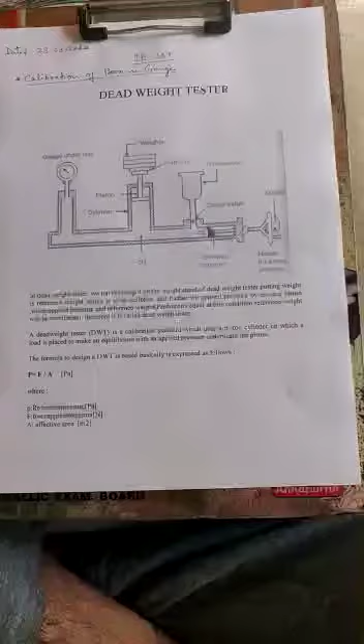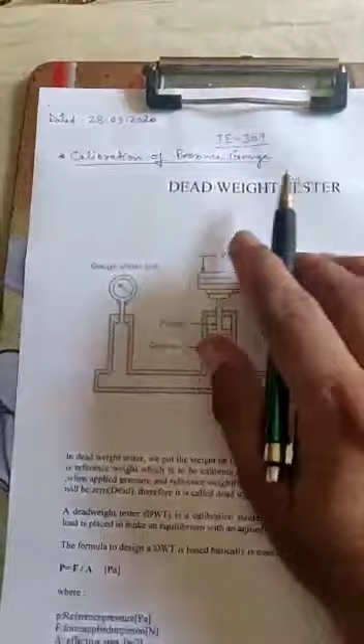Dear students, we are going to tell you about the calibration of pressure gauge today. It is a subject of IE 309.

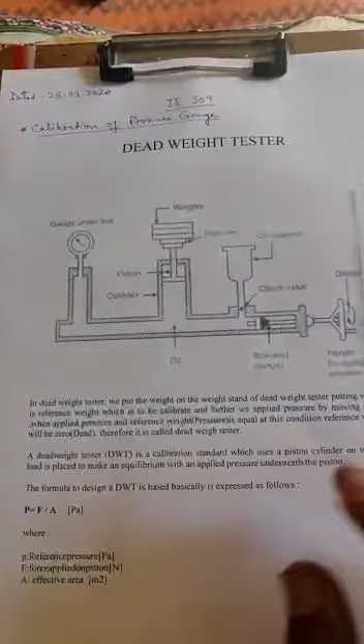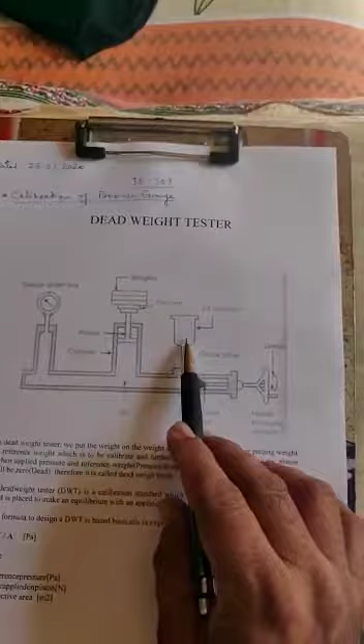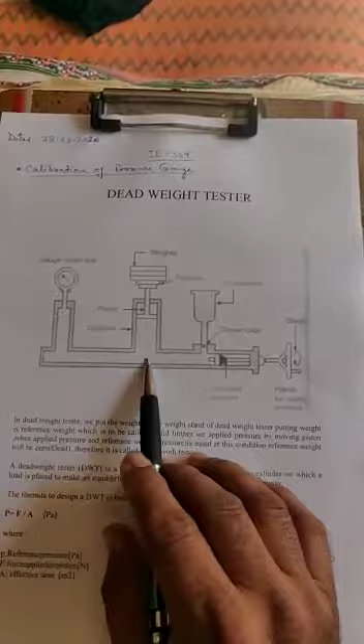In this dead weight tester, we can calibrate pressure gauges. As shown in the figure, here is a screw handle for applying pressure. Here is the oil reservoir. Here is the dead weight, and we put a pressure gauge which is to be calibrated fixed here. The remaining part shown in the dotted area is the oil filled in this pressure chamber.

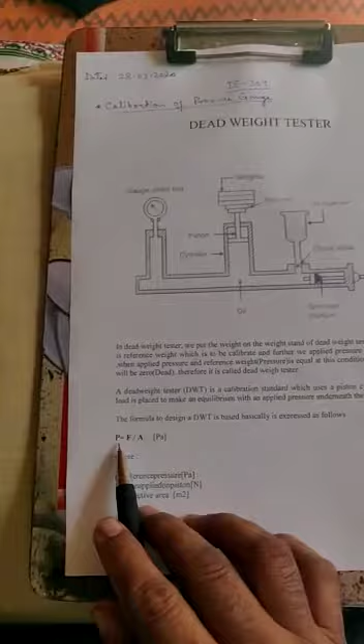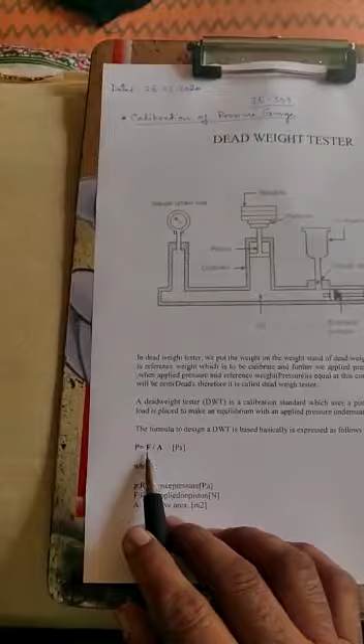As we know, pressure equals force upon area, where P is the pressure, F is the force, and A is the area. Pressure's unit is kg per meter square or Newton per meter square. Force is measured in terms of Newton, and area is measured in terms of meter square or centimeter square.

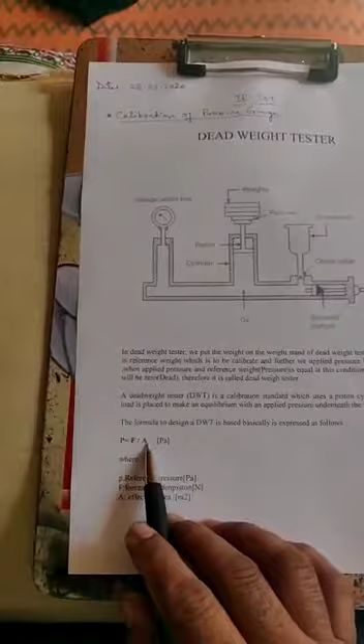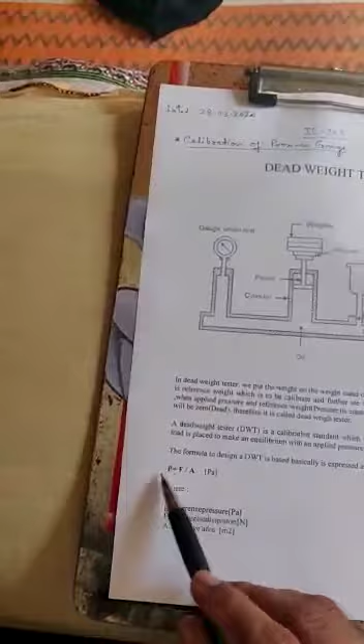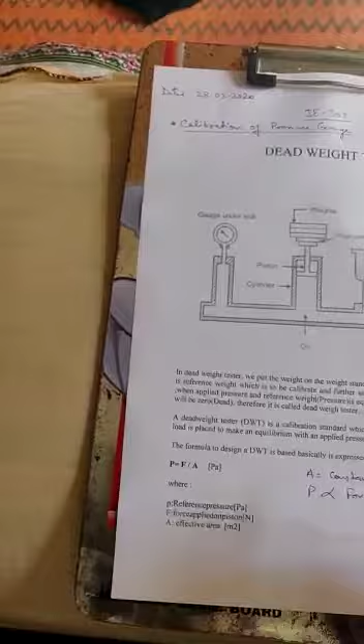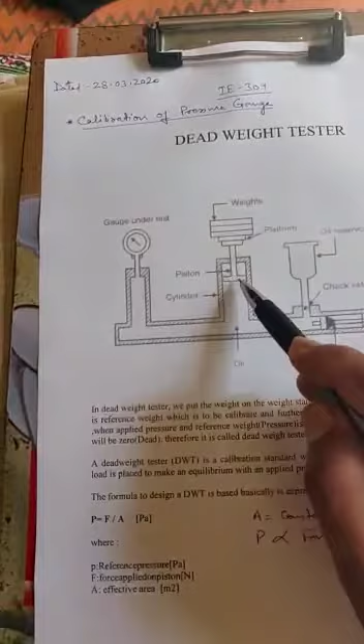In this pressure gauge dead weight tester, the area of this cylinder part is fixed, so the force applied on this in terms of weight directly shows the pressure, because if area is constant, then pressure is directly proportional to force. So force equals mass into g. Force is also directly proportional to mass. So we can say that the force applied in terms of dead weight directly represents the pressure.

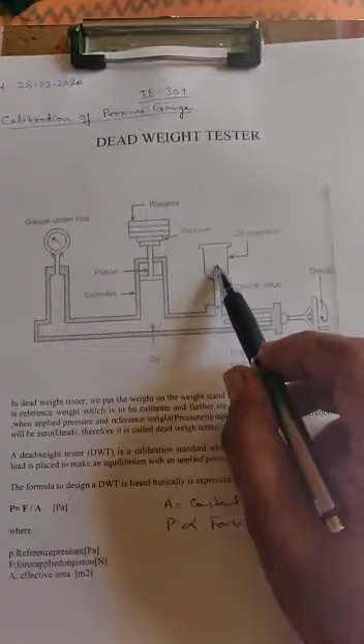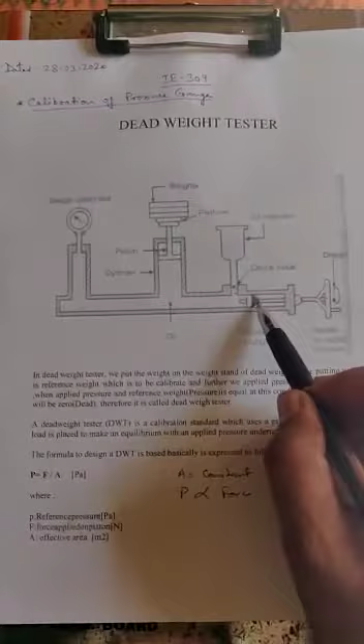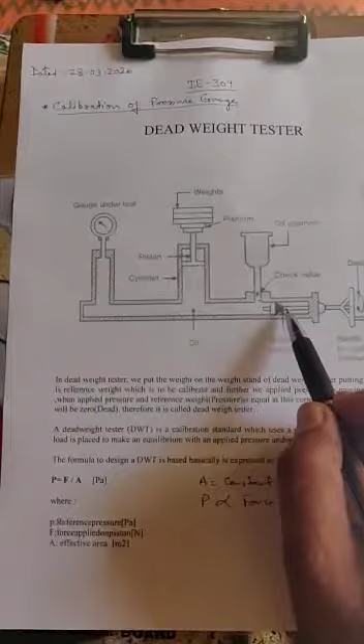The process starts like this. Initially there is oil filled in the reservoir as shown, and here is a check valve. Now we put a handle and rotate it in one direction. Then this piston moves backward, and oil comes from the check valve and fills this whole chamber. As soon as this oil is filled, we can put a weight on this as represented in the diagram. This weight puts pressure on the piston and cylinder part.

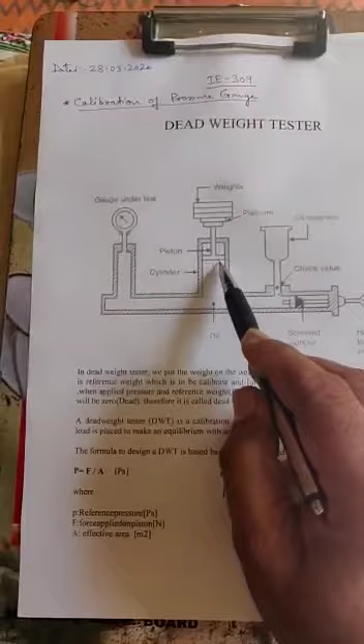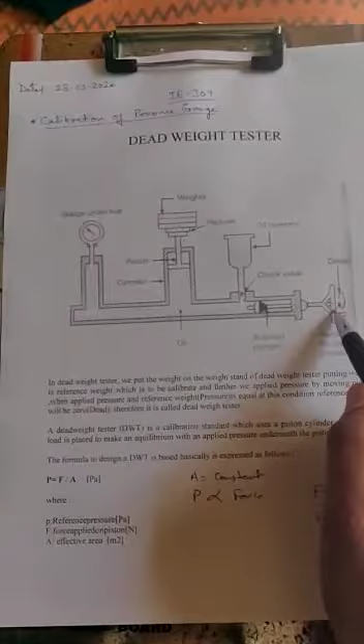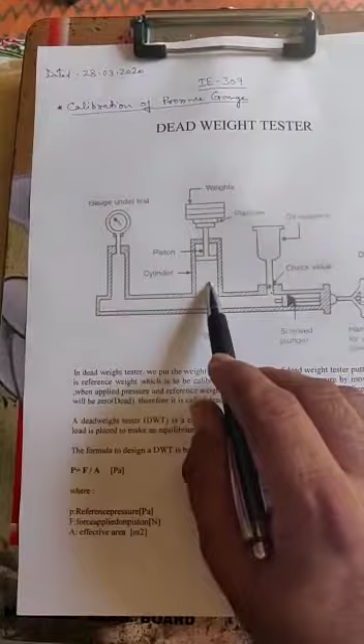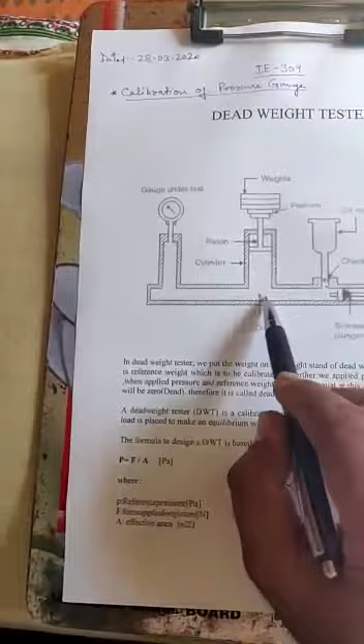As soon as the oil is filled and the handle is moved in the inward direction, the oil pressure increases continuously. When this oil pressure equals the dead weight pressure, the dead weight floats on the oil. At that time the oil pressure shows the actual pressure, and it is also shown in this pressure gauge. That pressure gauge basically shows the actual pressure.

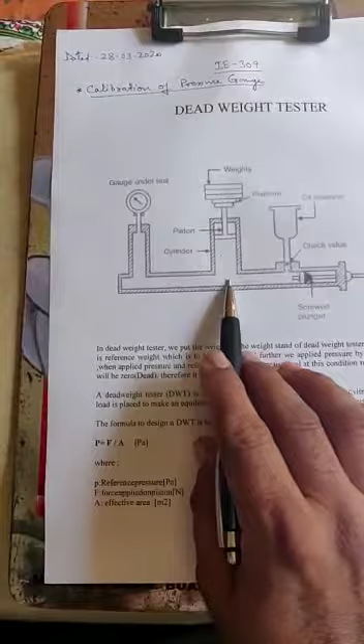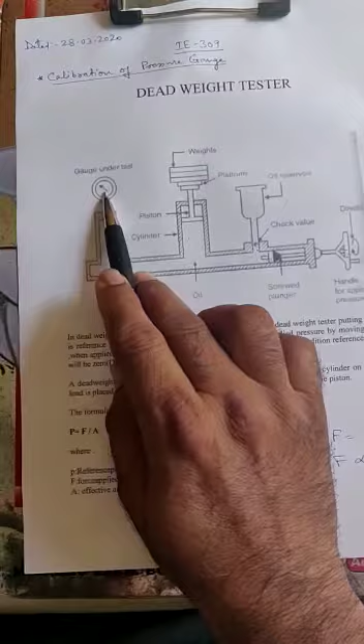If there is a difference, then it is to be calibrated, meaning corrected. The calibration process follows this way: we can check the pressure at zero measurement, then 25% of the pressure range, then 50%, then 75%, and then 100% of the pressure range.

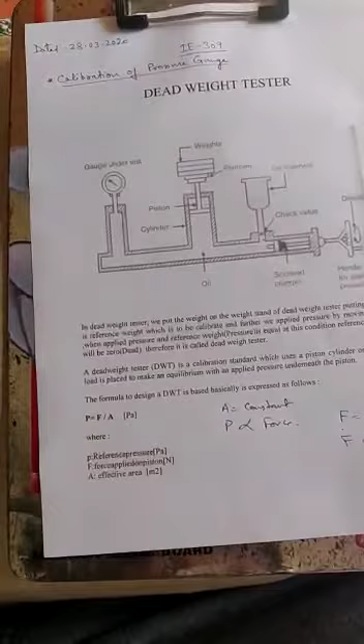We can increase the pressure gradually. Similarly, in the decreasing way, we can decrease the pressure from 100% to 75%, then check the pressure, then 50%, then 25%, and 0%. In this way, the calibration of the pressure gauge is done with the help of this dead weight tester.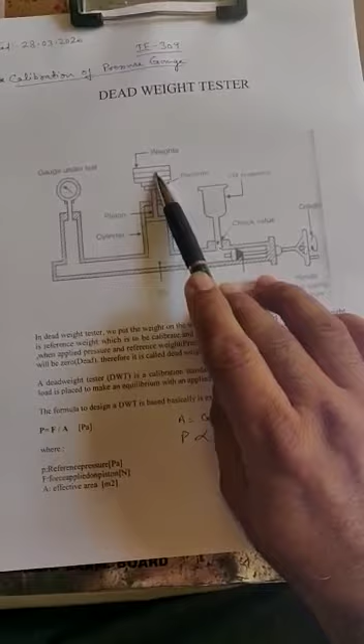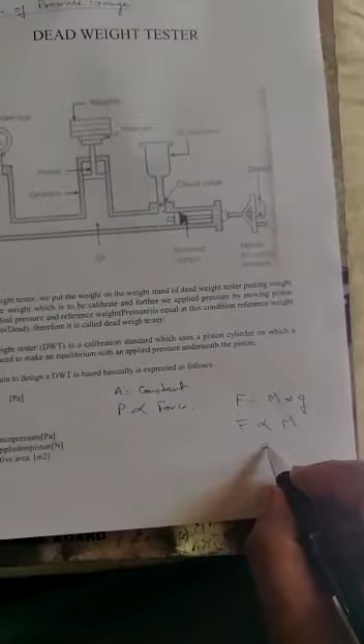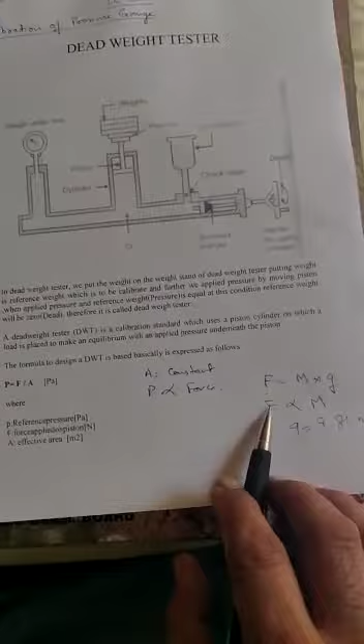The dead weight directly shows the pressure as shown in the formula. Force is directly proportional to mass, and since the value of g is constant, that is g equals 9.81 meter per second square, this force directly represents this mass, and mass represents the force. Then force again represents the pressure, and at a constant area, the pressure is represented by the force.

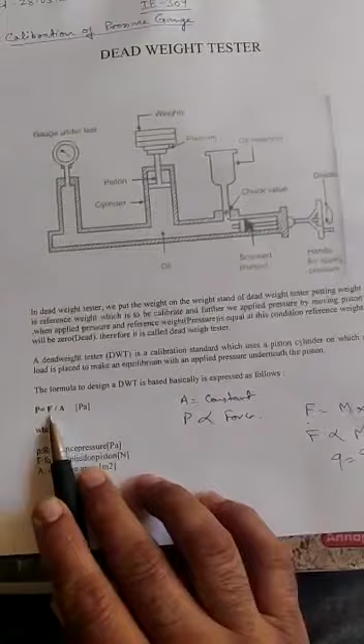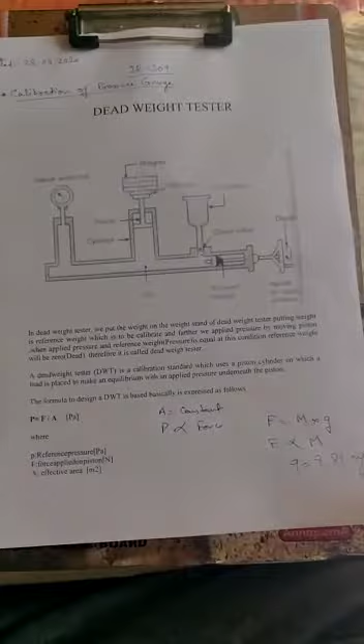So this pressure is directly calibrated in terms of mass. So this dead weight, hence its name, is dead weight tester. Dead weight directly shows the pressure.

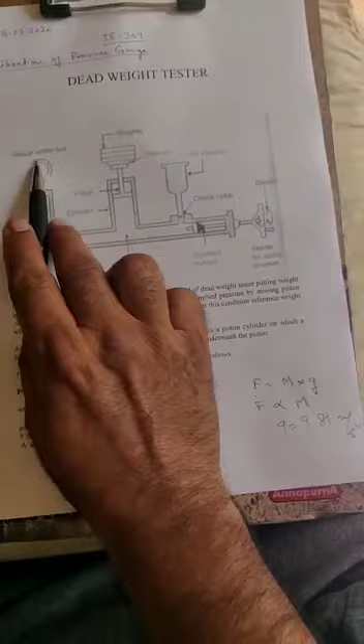This pressure is calibrated in terms of the pressure gauge, and the calibration process is just similar: 0%, 25%, 50%, 100%, and then reverse. And in this way there is a check valve.

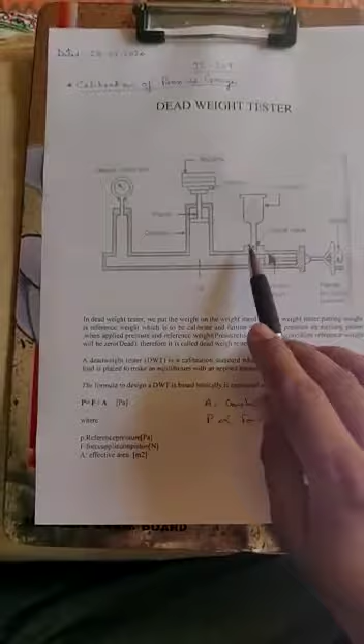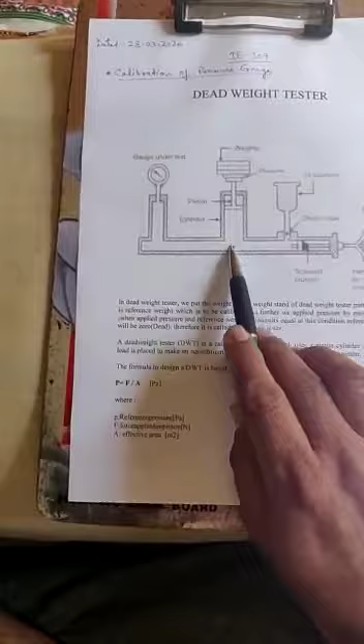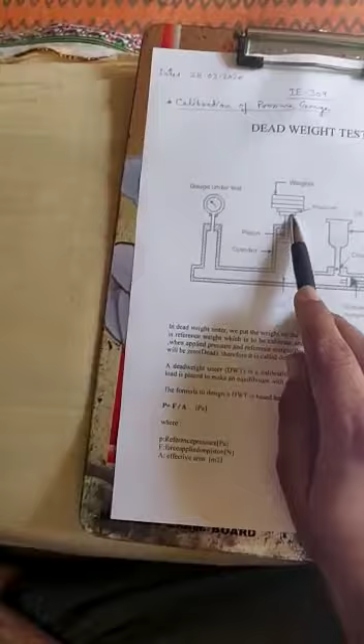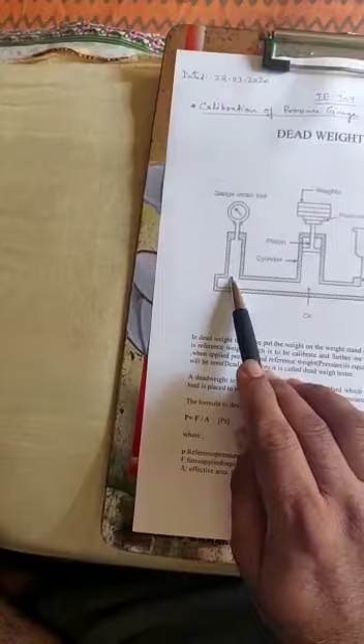It releases the oil when this piston moves backward. When this piston moves forward, it increases the pressure of the oil chamber. When the pressure of the oil chamber directly represents the dead weight pressure, then this piston is floating. Hence the pressure of the oil and the dead weight are equal. Then this pressure gauge is also similar to the oil pressure. In this way, the pressure gauge is calibrated with the help of the dead weight tester.